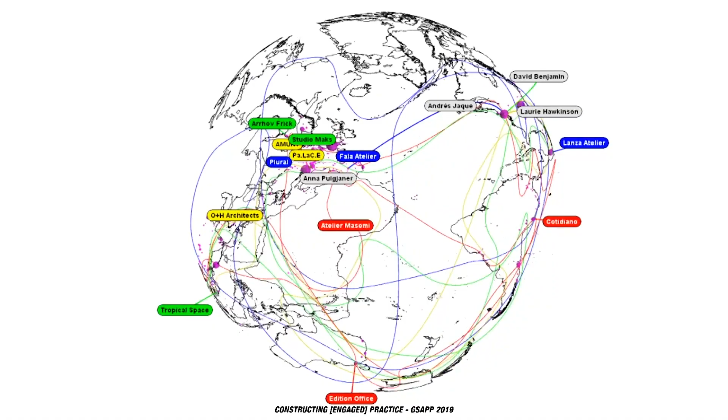That's the reason for renaming the conference as Constructing Engaged Practice. And perhaps we'll change the adjective in future editions as the architectural practice receives new inquiries from the outside.

We have selected four ingredients, we could say four engagements, shaping the present that need new consideration as materials of the project. And we have also selected twelve firms that are already doing it: sustainability, technology, politics, and theory will be the four panels of the symposium today.

They have been very present in architectural discourses in the last decades, an object of interest, speculation, fascination, prevention, even rejection. We could say that they came to the discipline, perhaps in the generation before you, as external topics—a collection of references initially peripheral to architectural practice, brought to the project as ingredients to be taken or not.

But today we can't consider these topics like that, because we know it's impossible to consider them as problems of others. They are part of the forefront of our contemporary panorama, replete with overflowing dimensions and important contradictions. And we, as architects but also as citizens, inhabit the center of that panorama, not the privileged periphery.

The twelve practices today, like in the first edition, have been established in the last ten years and will present the tactics they use to negotiate these conflicts and the contradictory climate that shapes our profession, and how they respond as designers to expand the field and definition of architecture.

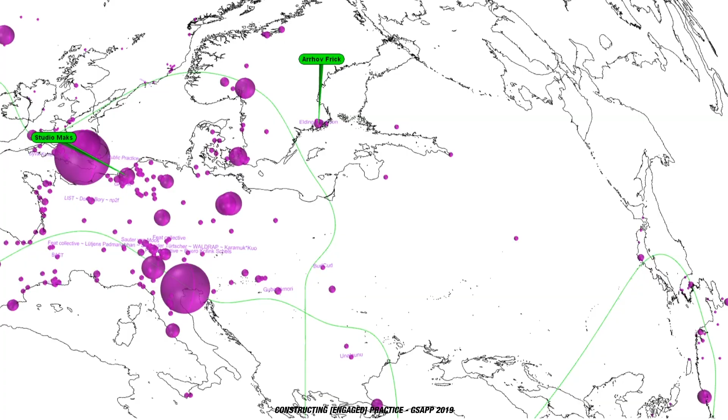Studio Maks: Marieke Kums founded Studio Maks in Rotterdam in 2010. The work of Studio Maks offers a distinctive all-scale blurring of boundaries between natural and artificial domains, between pragmatism and freedom. Her academic research group, Future Urban Regions, explores the reformulation of the existing city with a special focus on topics of this symposium, such as eco-environment and social and economic equations.

Tropical Space: Nguyen Hai Long and Tran Thi Ngu Ngon founded Tropical Space in Ho Chi Minh City in 2011. Like most of our participants today, they work at all scales. Their practice is a significant example of global thinking and local performance, focused on a deep understanding of Vietnamese culture and climate, committed to environmentally friendly building practices and sustainable material selection. Nguyen Hai Long will be helped on stage by Li Thi Nguyen, who will translate his presentation.

The moderator of this first panel will be David Benjamin. Thank you, David, for being here and helping this conference. David is founding principal of The Living and professor at Columbia GSAPP. His work combines research and practice focused on the intersection of biology, computation and design. Benjamin has articulated three frameworks for harnessing living organisms for architecture: bioprocessing, biosensing, and biomanufacturing.

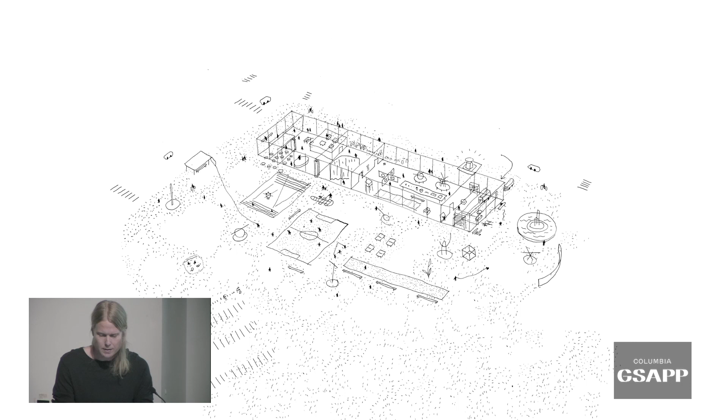In this case, a park in Dessau, where we did a proposal for a new museum for the Bauhaus collection. At that time, for the competition, the collection was spread across three different places around the city, basically in storages. The aim was to collect all those pieces into one space. There were amazing pieces, so we thought the museum was already there—just gathering the pieces into the park. We added what the collection needed: a new shed, more or less, protected from the weather, giving the space natural light and a certain amount of security.

Responsibility of economy is key for us—economy in terms of material, doing the most of a budget, and economy of energy as well. We don't like to design something that everyone has to fight to get built or solve. We want to do something kind of the opposite, that is simple to put together.

This is from my first study trip in architecture school. We visited France, and it was an amazing trip. We looked at all those masters and amazing pieces of architecture, but we also looked at the Latapie house by Lacaton Vassal, which was very special and a strong experience for me. By that time it wasn't so much about extra space, but I remember it was a lot about components and structure—perfectly balanced according to its loads. A beam was not larger than it needed to be; nothing except the necessary was present.

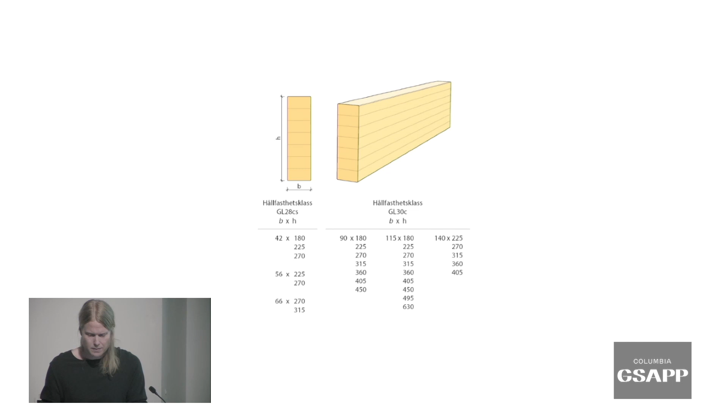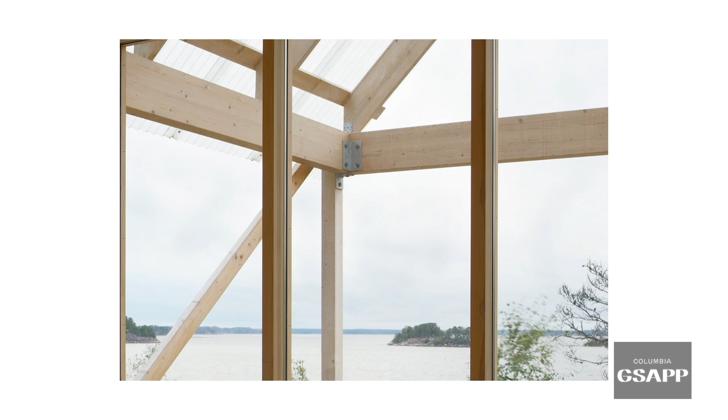We developed a structural scheme consisting of those parts, all components dimensioned as minimal as possible for the purpose—just enough to make the structure stable. The components connected to each other with bolts going through the main beams, and the windows were divided into parts to be carried by one person.

And this is how our internal process looks like. It's always about questions and comparisons - why choose one beam or slab or pillar or system over another? To figure that out, that is our main thing at the office, I would say.

At the moment, we're proposing not only one solution, but several options of how to add free-spanning platforms for a cultural building in a small town in Sweden. We're presenting this project component by component, both for the client and for the city, showing them the possibilities, economic pros and cons, installations, and everything.

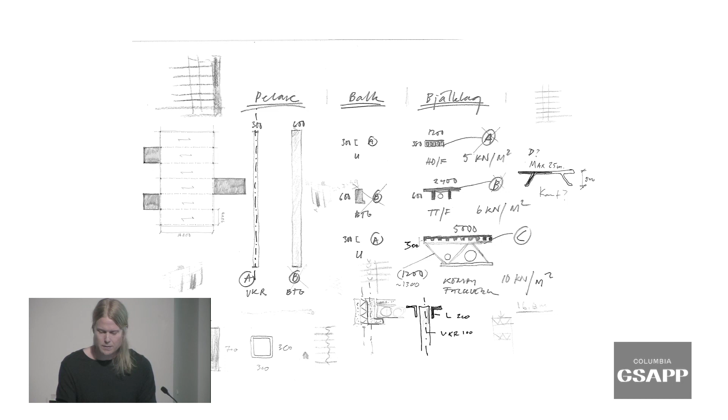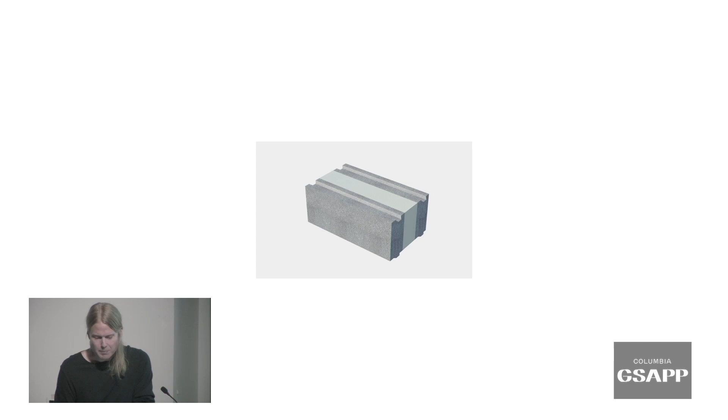In a house we called Six Walls House, the client had a builder already before we started. He was not the best builder, but not very expensive, and he didn't know very well how to build in wood, which is the thing you do in Sweden - Sweden is made of wood, more or less. But he knew and had experience building with light concrete blocks, so it became the only option.

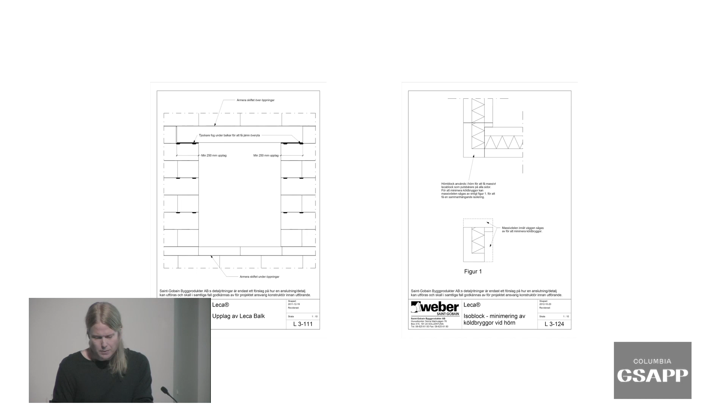And we started by looking into catalogs on the material and its qualities. Basically there's 3 types of blocks, and also one solution for openings, adding a beam. So we used this and started to develop ideas about the most simple geometry you could do, that could not be made wrong, regardless of the builder.

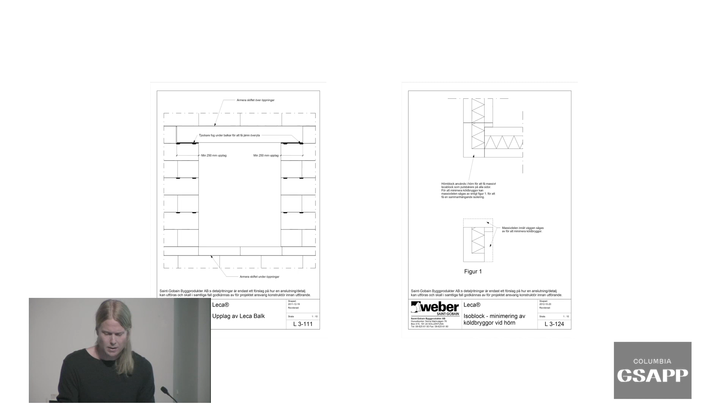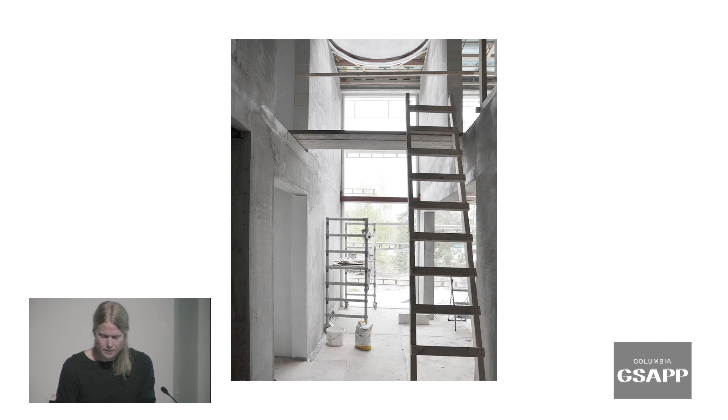So it became these 6 straight walls defining the rooms, as well as becoming the structure of the house. The inside spaces were almost randomly developed. The arrangement of the house was a lot about how to achieve a minimal amount of cutting of the blocks, to use every piece of block that you had, as well as creating as spacious a house as possible - a house developed from the block.

So we want to learn this profession slowly. We don't rush into things. We like to understand what we are doing and what we are proposing. We want to understand every component that we are proposing. We don't want to be doing things too quick. To handle economy as a sustainable approach, we like to see this a little bit like craftsmanship.

You need to know the basics of planning. We did not learn this in school, which is fair enough, but it's really important. It's not rocket science, but if you don't understand this, it's a bit tricky to propose something else - the basic knowledge of where material comes from, the parts that you can get from a tree, for instance, and use every piece of a tree in the best possible way.

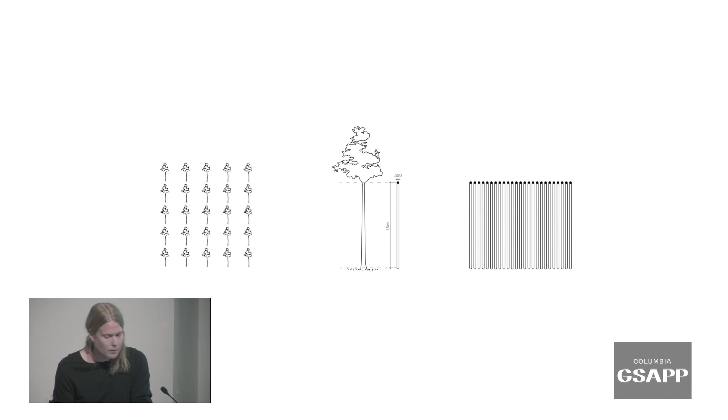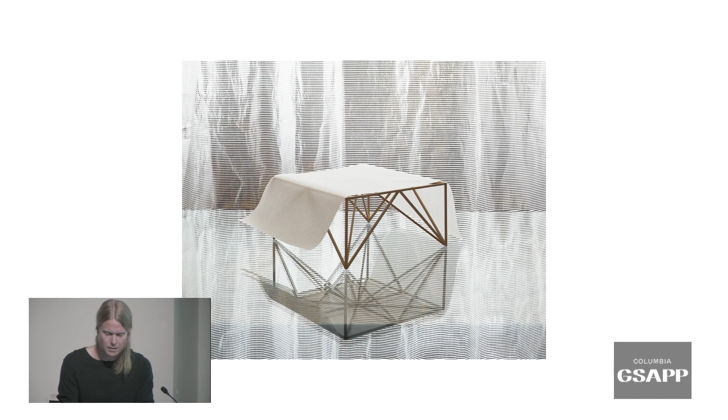25 Trees was the title of a small research project we did at the Venice Biennale in 2016, where we investigated methods for achieving the maximum amount of built space using a minimal amount of material. The result became a truss-like structure depending on the stable triangle, and because of this geometry, each element transferred the tensile and compressive loads with no additional need for stabilization. The scenario became a hall of around 2,000 cubic meters, out of 25 trees.

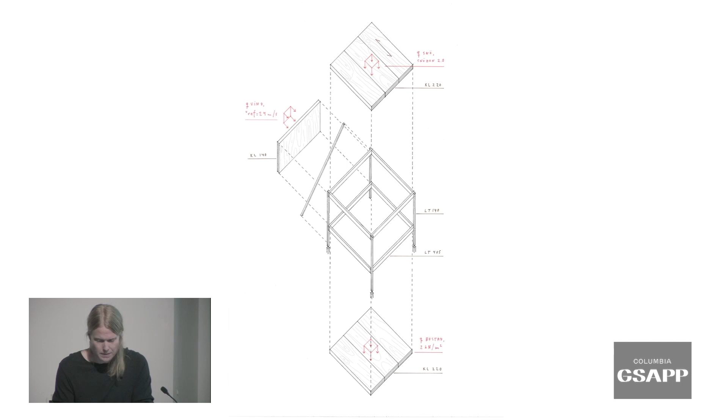At the moment, we're working with ideas for a low-budget weekend house - there will be around 10 of them in a forest area a couple of hours north of Stockholm. Here again, we know everything about this catalog of posts and beams in wood, so we choose that, making as large spans as possible. The floor, roof, closed facade - massive timber, like these old timber cabins, so you don't need another layer of insulation. It's insulated in itself. If you don't have a wall, you need a diagonal beam.

The cultural building I mentioned before will be built in this - it's actually a really small town in Sweden, around 10,000 inhabitants. Our client who has this block asked us to develop this, and the moment we started, we realized this project was all about creating a good foundation for a realistic economy.

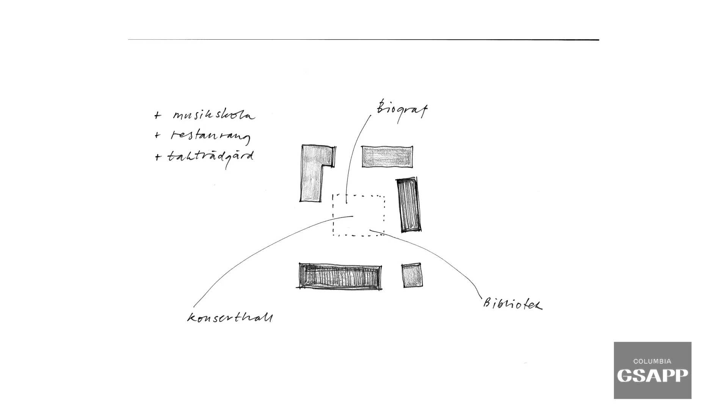So first we proposed to actually add extra program in order to help each other work. There's a lack of a music school in the larger area around the town, so we proposed to add that in relation to a concert hall. And the city, as well as the concert hall, needs a restaurant and so on - so it's about this kind of co-working, sustainable economy.

We aim to respect and learn from every specific site, to be as careful with that as the building component and the economy, to be very careful when changing a site. As much as possible, we want to make building not interfering with nature, like you could one day more or less demount a structure and put the nature back where it was. The weekend house projects we're working on are now made from components assembled with bolts, with as few touching points in the ground as possible. We want to make nature one of the components, you could say.

In the Bauhaus project, it's a light and generic structure placed on top of the park, possible to rearrange and even remove.

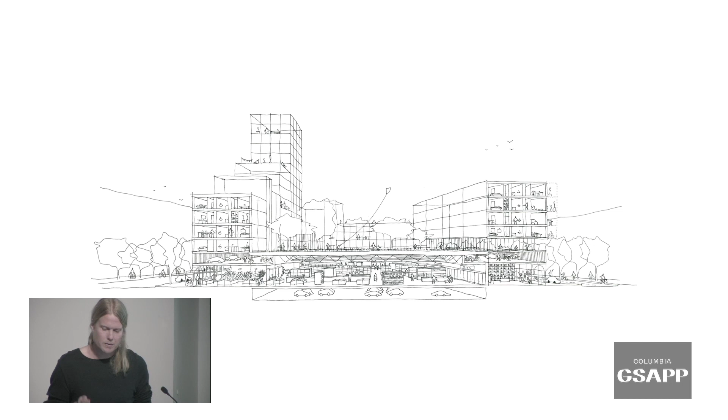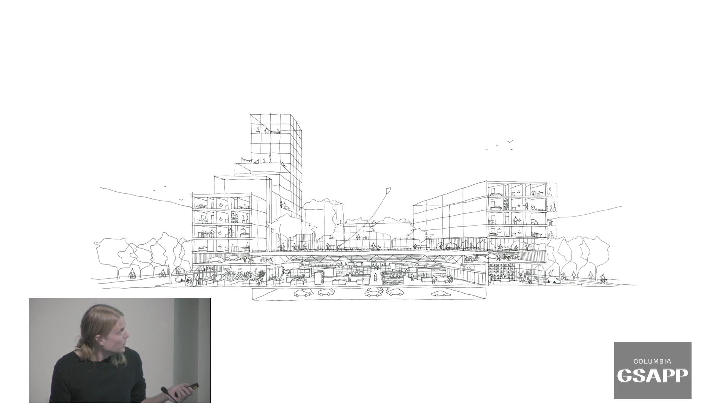In the outer ring, we were really careful about what to add and how to place the structure in order to split this part up. We also could gain this extra floor here, and instead of digging more into the ground for parking, for housing, we put it up here because it didn't need this ceiling height. So it's this kind of small adjustment to, I don't know, gain or save - not save the earth, but yeah, in one way, actually.

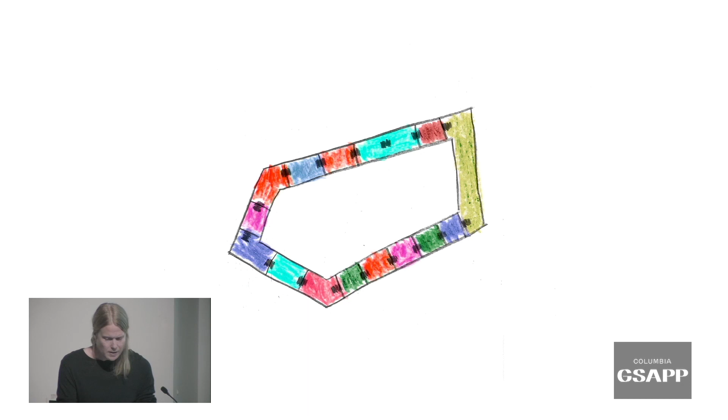So the result of the ground floor programming, with all staircases and structural walls, is shown in this sketch. It kind of forced this large space, the outer ring, to be divided into smaller pieces. For us it's important to take a clear opinion on how to propose this kind of relationship between building and street. Sometimes we don't want a building to interfere.

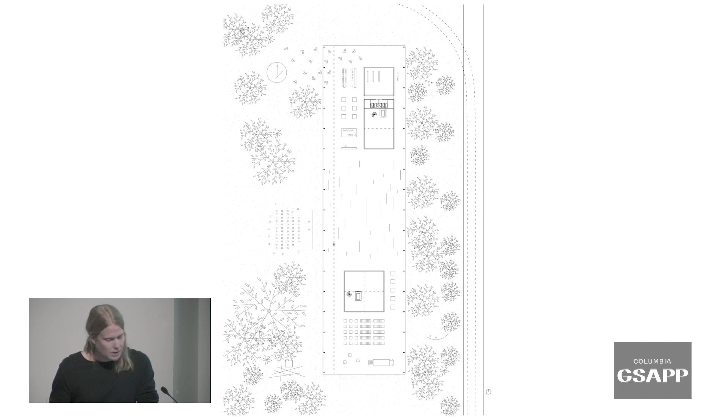The Bauhaus plan, with the context: the main street to the right, where you could load from trucks - you can go into the building with trucks - the main entrance to the north, closed volumes, and the in-between completely open. This was the first sketch we made for this building to interact with the park, which could even have programs as well.

In our space we find ways to let the light enter in special ways, maybe make it a little bit stronger with colors. We placed all the species really carefully to make them happy.

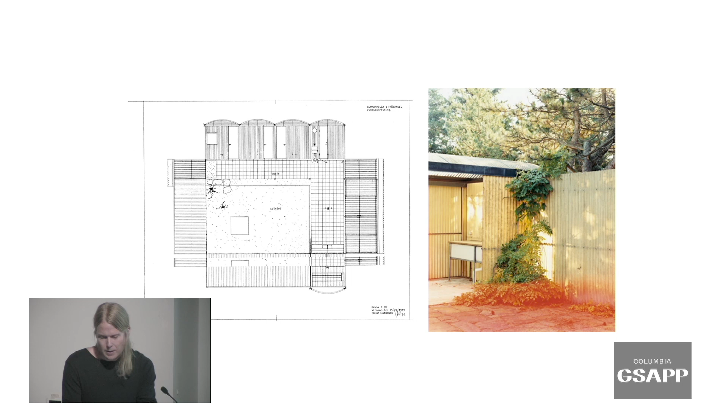This is a really nice project in Sweden from a Swedish architect, Bruno Mathsson. He was operating in the 40s - his own summer house - and he was really obsessed with the idea of living outside. He even made his own device for sleeping outside. He had sun gardens, a sequence through the building, through the inside, and this roof with a plastic covering letting the light inside.

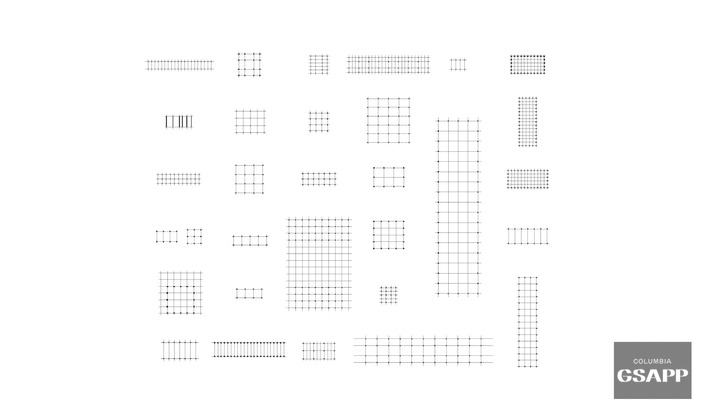So this is not a model of one project, this is different projects. We don't feel a need to invent. We prefer to reuse, even ourselves in our office. So we have this database of our old projects regarding structure, what worked, what didn't work so well. Same with rooms, proportions, windows.

We don't aim for one solution in complete projects. We're interested in open structures with multiple options to rearrange. Now we're changing a project from 50 to 80 units, but the structure is already built.

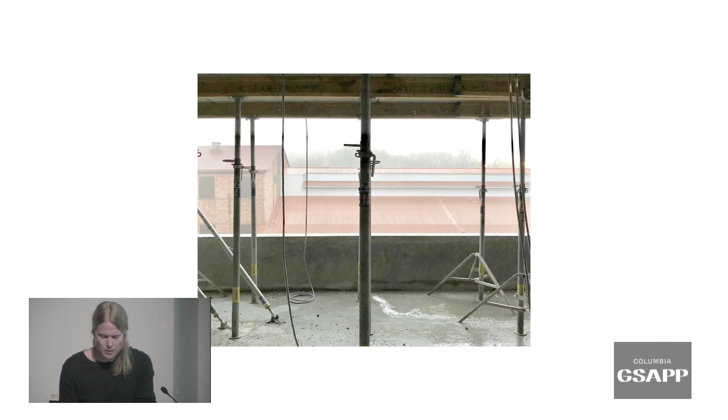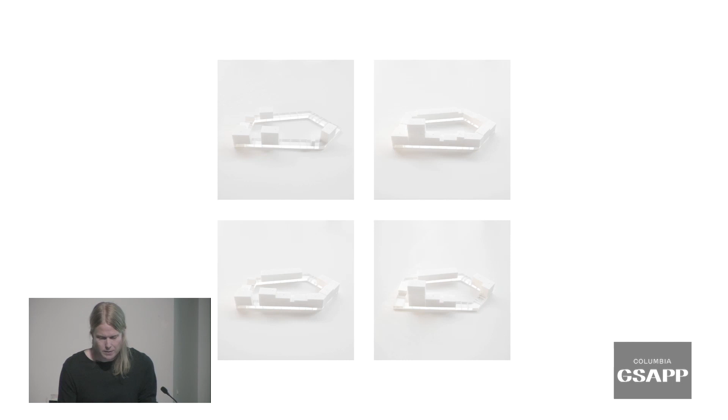This is a common scenario for how we present a competition proposal. This is for the ICA, where it was completely open-ended for future development. At the moment, we're working on a couple of projects without a program, as a proposal from us. Who knows what the future will be for those kinds of large-scale developments.

So we reuse and modify the systems a lot, just making sure that the quality of light is good, the noise is controlled, then we often present the possibilities of the system open for discussion.

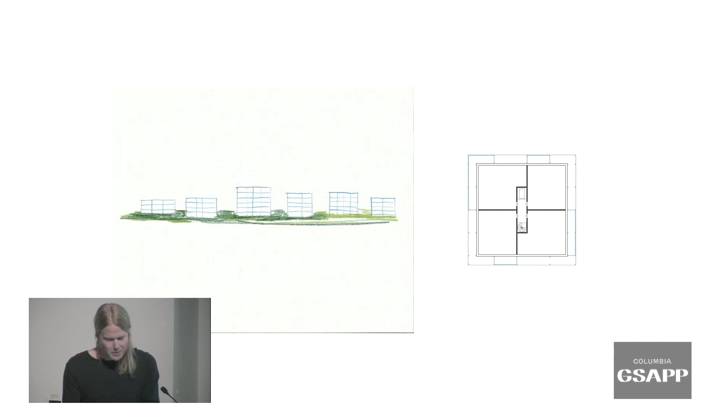So I'm just about to finish now. To let the people and their own way of living create the building or places themselves is central. Not an idea from our side, but from a human perspective.

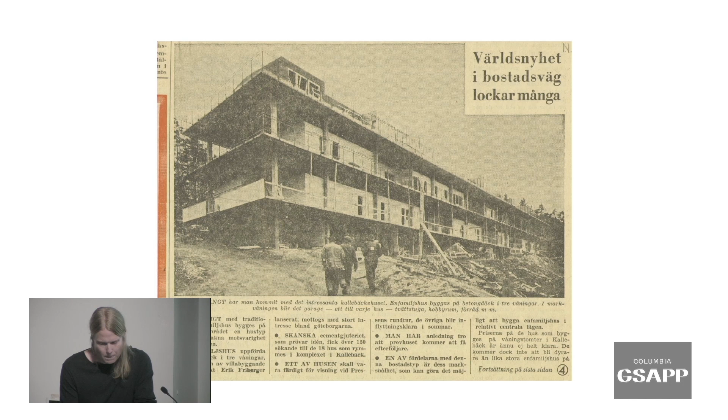There are some really good examples of this. We always find those kinds of direct and realized projects very interesting. This is a project from Sweden where they did 3 platforms in concrete, 80 meters long, and just divided them into plots.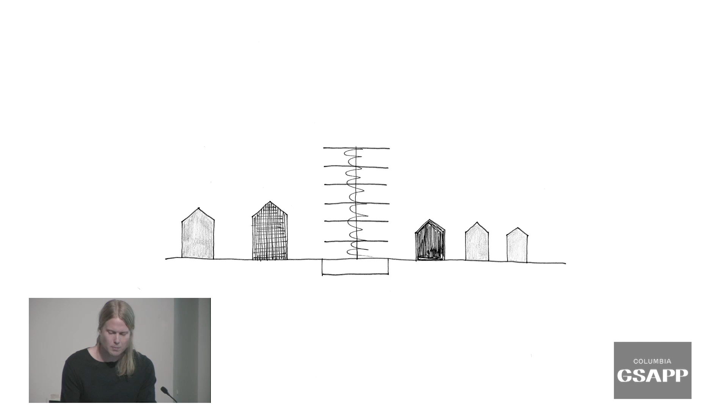So in this small town with the cultural building, we are using exactly the same ideas. The client asked us to insert the cultural program into the existing buildings, but we proposed to keep them and make a new one in the center.

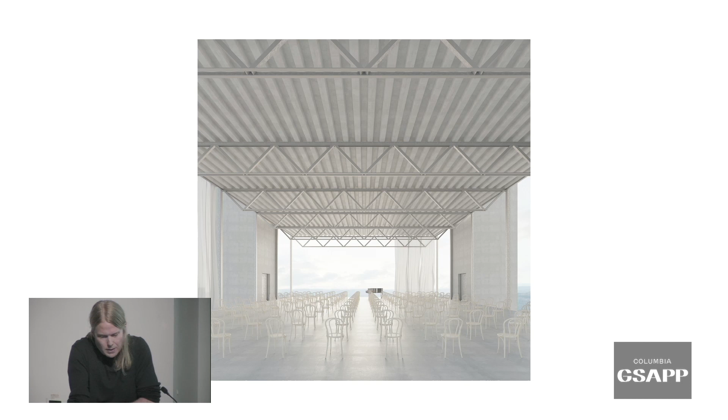So the ambition is completely open platforms, 20 by 30 meters, that will be developed by the city and the people. So perhaps this is our idea about sustainability: the constructive components, open-ended, economic responsibility, natural light, the presence of nature, and the people making it possible. Thank you.

Like Johan said already, it's amazing, this conference. I wish I had it when I was in university.

My name is Marieke, and Studio Maks is my office. There's a lot of people helping to create projects, it's not just me. I've been asked to talk a bit about sustainability, and actually our office is not so known for sustainability, but we are very much involved in creating designs that have great awareness of the environment. So maybe I would like to talk today about natural design, which kind of is in your sub-description, I guess. So I'm cheating a little bit.

I'm going to also explain a little bit how I came to have the office as it is. Like Johan was saying, it was not a very conscious act. Things happened over time.

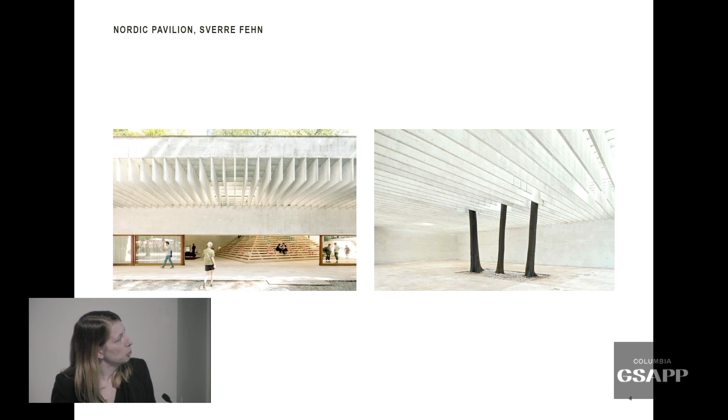So it was really great at TU Delft to get a lot of opportunities to study abroad. I went a bit to Norway, and of course they have really amazing architects there. I fell in love with a lot of the work of Sverre Fehn, and this is still one of my favorite buildings of his, the Nordic Pavilion in Venice actually, not in Norway, but still very beautiful.

Anne taught us a lot about how to experience the landscape, but also to be aware of the environmental influences of the weather, etc. And Eve Blau, I followed a class about transparency in architecture and how to create continuous space, or space that is changing, and she had really wonderful stories about it. So it really kind of freed architecture a little bit for me.

Another amazing thing about Holland is all these kinds of subsidies and scholarships. I got a scholarship to travel around the world, visiting 10 cities in each 10 days to study global architecture, and somehow I also ended up in Tokyo, and I really fell in love with it. I think many people have.

What was really amazing for me was that such an amazingly big city could still feel so extremely relaxed. It's very much a city of objects in which buildings and people and nature, not in all the places, but in some places, found a very equal existence. This became a very important theme in my work.

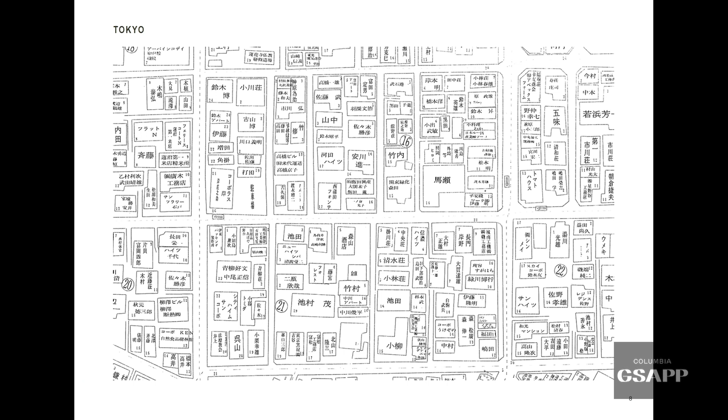The first project I worked on there was also very interesting for me, actually quite shocking. We had to create a space for an event in Benesse Art Site, a group of islands in the middle of Japan. We didn't really make a space as you're used to, with a roof and walls. It was so lightly created and so intuitive how to use it, so non-descriptive that I was amazed the space could be this light. It really opens up a lot of opportunity to create things.

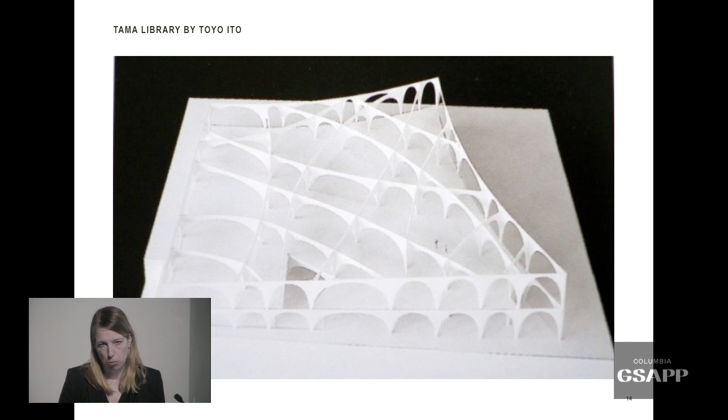There's another person that was very interesting for me to learn from, which is Toyo Ito, and the way he creates designs. I think his way of making things is really a reaction against modernism with its more regular grids. His way of connecting to the environment and to nature is deforming this kind of regular grid and trying to make it open up to the environment, therefore distorting it, which gives all kinds of specificities to places inside buildings.

There's never one space the same. He has this nice thing to say about the way he designs - he calls it generative order. As a tree assumes its form depending on its variety, and by repeating very simple rules, the tree creates a very complex order, but also a very natural order. A tree also decides its own specific form and growth, its shape in response to its surroundings. So it's not a thing on itself, it's something that responds to the surroundings. It's always open to the environment, and when you're under the tree, you don't know if you're in or outside.

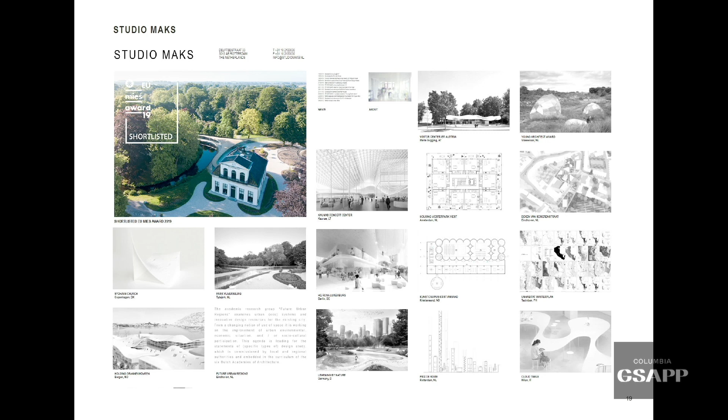At some point I decided to go back to Holland. I did want to start my own office. I didn't know exactly how, but I did think that if I want to create good work, I should do it in a place where I have the most opportunity to do so. And I thought that would be the place I called home, for many practical reasons also.

When I started the office, I received a talent scholarship from the Dutch government, so I could be free of financial worries for the first year, which was amazing, because then you can actually do projects and not worry too much about the financial side of it, and try to explore what you really want to do. Some have the lucky chance to start their own office right out of university, and a lot of us also work for other offices before starting our own thing. For me it was quite a challenge to find my own voice after working for other people for several years, and this scholarship made it possible to do so.

I'm just going to talk about 3 projects to explain a little bit how we work, and they're the 3 more recent projects.

And this is the one that we completed last year. It's a visitor center in Park Vijversburg. And it's also interesting how you actually get projects for your office.

In the beginning, you're very eager and you want to take everything, and at some point you become much more specific. But a lot of the nice projects, like in the Netherlands, there's almost no open competitions. You have to participate, you have to apply with your portfolio, but if you didn't have your own work, you cannot really apply for projects.

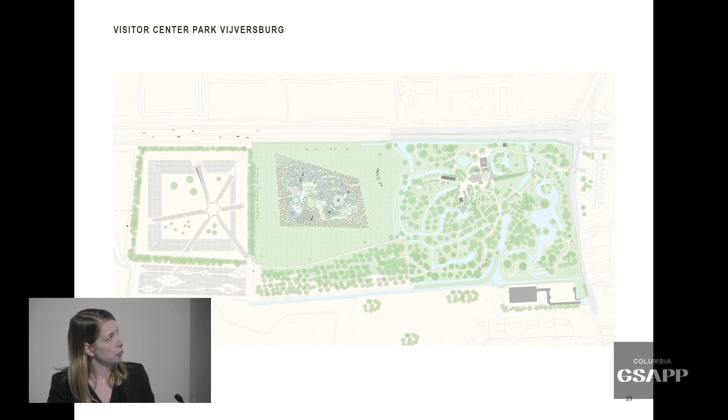This is actually a park from the 1700s, a few hundred years old, and this was the historical mansion. We were also asked to renovate the glass houses, make an open-air stage, and renovate the main house. So there were a lot of little projects all together.

We really wanted to try to make a very subtle intervention. This park is actually a national monument, as is the house, so you're almost not allowed to do anything. It needed to be placed here, but it also needed to be connected to the main house. So they had a lot of requirements.

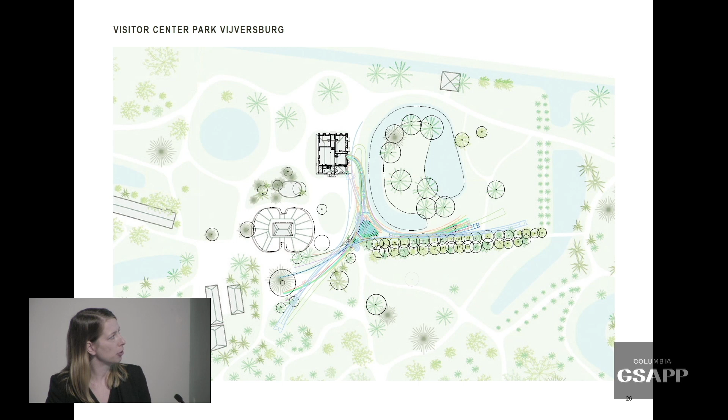So we said, okay, we want to respect the environment, we want to respect the existing landscape. So we pulled 3 lines along the main elements, and then we tried to situate the visitor center in between, and it becomes almost like a little animal. Every time we found there's a tree there, okay, we move the building a bit. So it's kind of dancing until it became a final form.

We also really respect the budget of clients. Sometimes we get comments that we make a bit crazy designs, but we always make them very carefully. This building form is also decided by optimizing the shape of the panels, the number of building products, and standardizing as much as possible so it fits the budget. In the end, we managed to make it fit the budget.

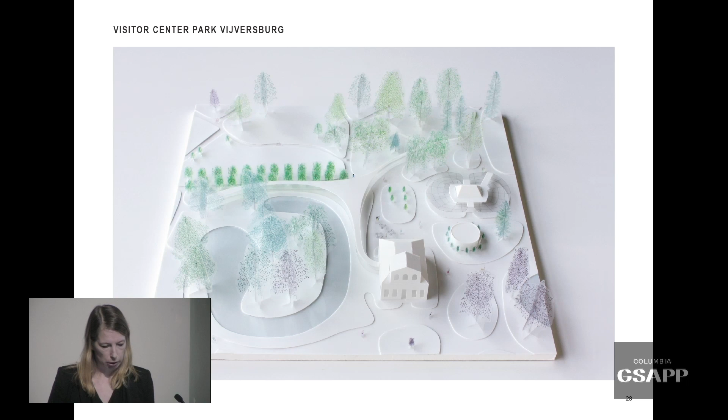This is a model. We work really a lot with physical models, also to communicate with our clients. And this is the building. This is the historical house, and this is the pavilion.

When we were talking to our client and presenting it in the competition which we won, we still had some columns in the building. But when we had to present to the monumental committee and say we can build something like this in a historical park, they said okay, you are only allowed to do it, you can only get the building permit if your building becomes as transparent as possible and doesn't become this really fat, ugly green glass building.

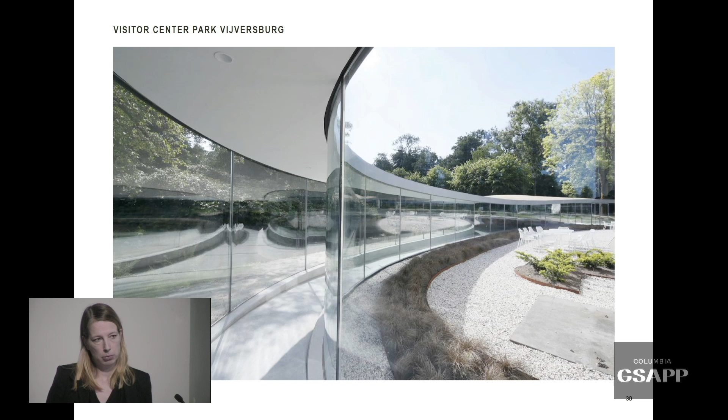So we spent a lot of time optimizing the transparency of the building, even kicking out the columns and making the glass the actual structural component of the building. In the center there's an auditorium where 100 people can sit, but basically if you enter the visitor center, you're redirected to parts of the park.

This building has to do with, like in the Netherlands, it's not really a question if you were making a sustainable building. The sustainability requirements are so high, almost the building has to be energy neutral, so you have to be very inventive if you want to make a fully glazed building.

So here also you see slits along the ceiling. This has a tropical roof, so the air can naturally ventilate through the roof. There are shutters there, and it goes out through the gutters of the roof.

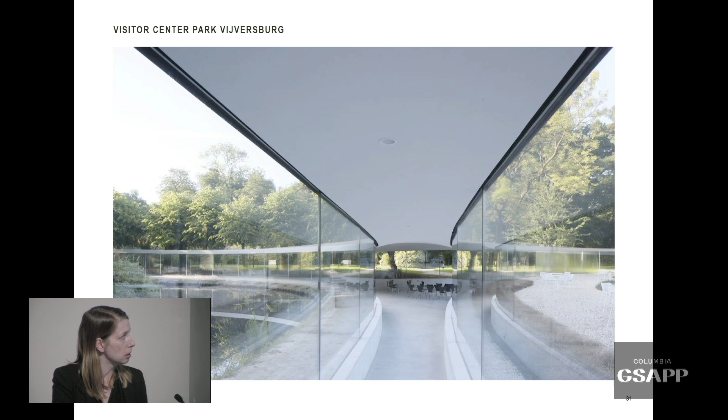The glass is made with a high insulation value. We have little magnets in the ceiling, almost invisible, so you can hang curtains as sunscreens in case necessary. In this way, we managed to complete that building and try to make a building where, when you are in the building, you actually feel you're outside.

A second project I want to explain is not realized yet. We're working on it now. We just received a building permit and they start construction next year. It's a housing project in Amsterdam, and it's actually done with a project developer.

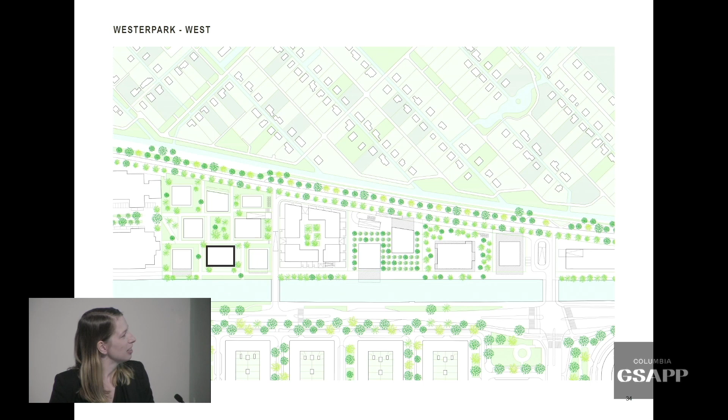It started by MVRDV that organized a competition for young architects to give them a chance to do bigger projects, which is very nice—they're becoming the mamas and papas of the younger generation. We won a housing block here with 40 apartments inside. The developer just wants to make money, so as long as you have a really great plan, they're happy with it. So we were allowed to define our own user group, the number of apartments, etc.

We said it's really difficult for young families to stay in Amsterdam. The housing prices are getting really high, around 10,000 euro per square meter. So if you buy an apartment for 50 square meters, it's 500,000 euros, and a lot of people don't have that money. So we tried to give a very compact family house with 2 stories and a garden, and stacked them.

So the family has a really good condition of living in the city, and it's still affordable, and they feel like they're living outside. In the Netherlands, the ultimate family home is the home with the garden in the green. So we have these super compact apartments, all surrounded by large balconies. Some have 40 square meters of outdoor space, and their own home is only 70 square meters.

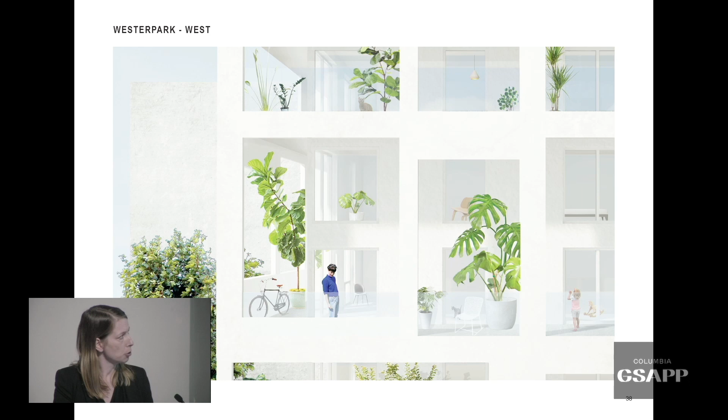These zones around the houses become a buffer between the city and the house, between the very public space and the very private one. They also help for sun shading, act as a sound buffer, and because they can put a lot of big plants there, they create a kind of microclimate for birds and little bugs to exist in the city. There's a lot of research for this in the Netherlands.

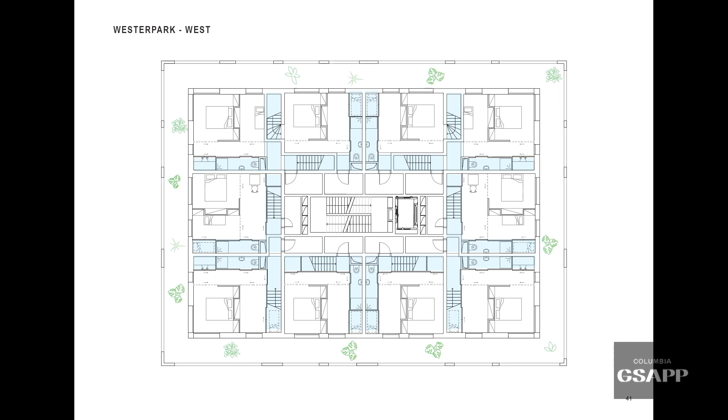Inside the house, we also developed a new housing typology with very compact walls containing toilets, kitchen, and everything, so you can create open spaces and use the square meters very efficiently. This is the ground floor of the house, and these are the upper floors of the family apartments. You can even have a little study, maybe a kid's bedroom. It becomes all very alternative living.

Another competition we won—actually, we win most of the projects we have through doing competitions. This one is an open competition in Austria. That's another interesting thing in Europe: you can easily do projects in other countries as long as you speak the language a bit. It's a visitor center for a new university just outside of Vienna, specialized in biosciences and natural sciences, and they wanted a visitor center to receive guests.

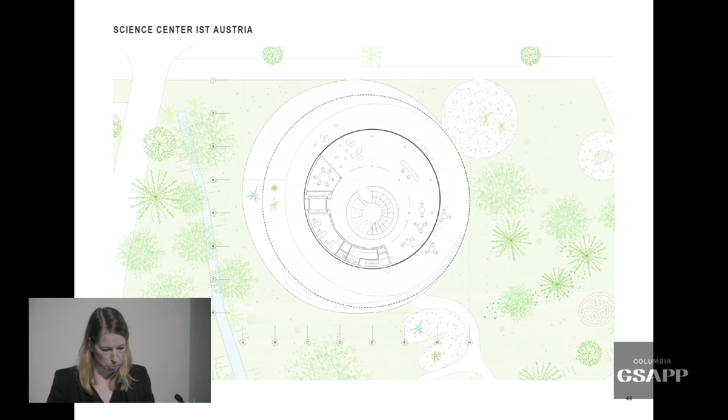But also to explain what science can make possible. We created a little floating cloud in the park. This is a very monumental site, and we wanted visitors arriving here to still feel the beauty and the outdoor space of the park, not go directly into an enclosed space. We designed a round volume integrated into the park that can be approached from all sides, with a big staircase going downstairs, and really big exhibition spaces underground.

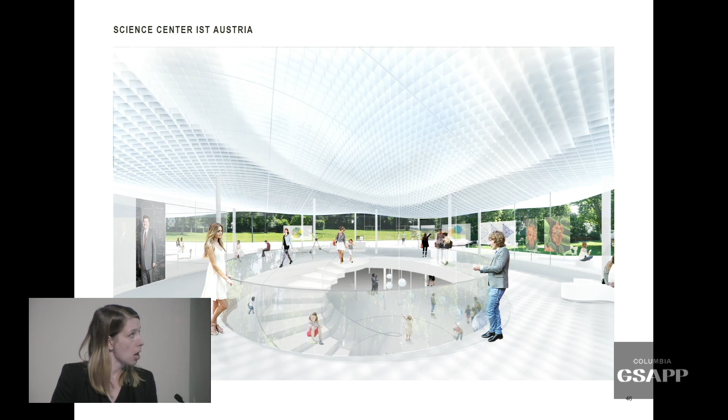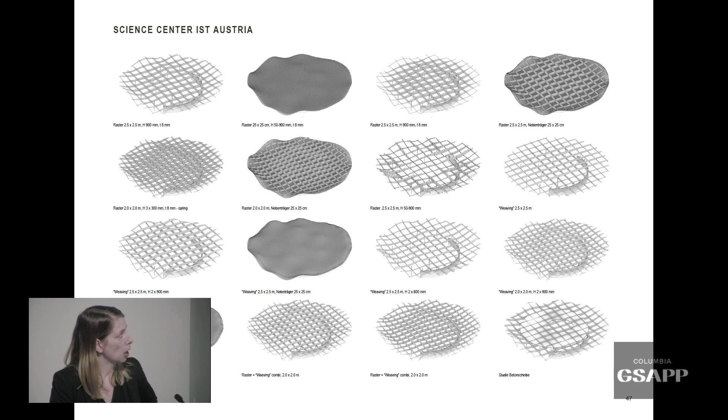We're testing a lot how to create this project by optimizing the structure, because here too there's a very tight budget—optimizing how we can produce the structure, how the light works, what kind of effects it can create, and what optimization of the structure means for the interior experience. We make one-to-one mock-ups in our office of parts of the building to see if it really works as we want it to work.

I'm just closing off a little bit. I think there's many ways to make architecture. For me it's very important that it's rooted into its context and linked to the people that use it, but that it also creates a certain freedom and inspires people. But there's also this relation between technology and society and the forces of nature, and this all plays a foundational role in our design process.

We use our work to explore the cognitive possibilities of architecture and how the built work can impact the way in which we know ourselves and the environment. So architecture becomes a tool to understand the world and also to improve its situation. Thank you.

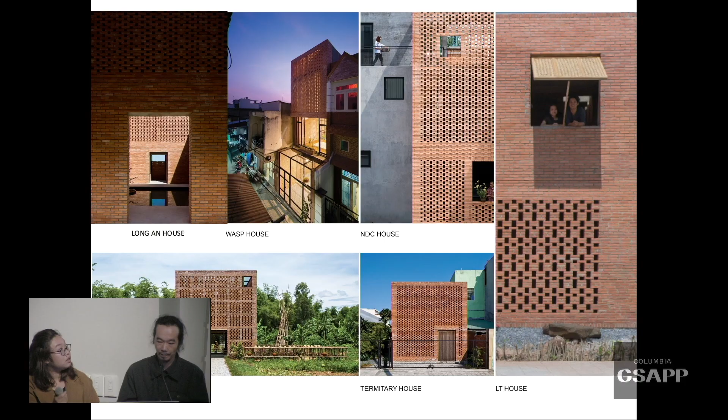And this is the project that we've done in our practice. Different projects have different contexts in different regions of Vietnam, and they're dealing with different issues. So I hope that by introducing some of our projects, we could show you the context in Vietnam and what we're doing at our office.

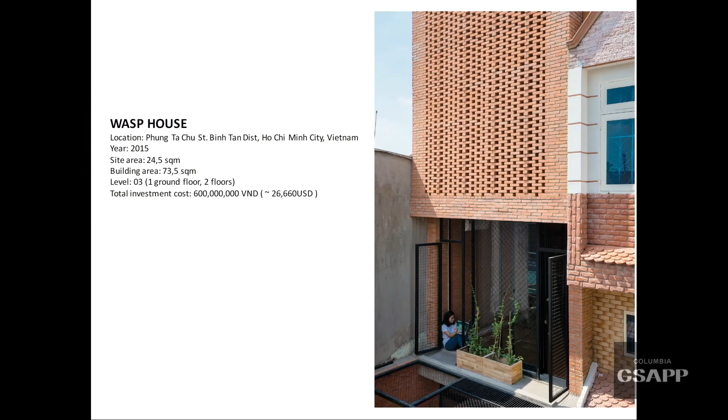So this small house is in a small alley, a small neighborhood of Ho Chi Minh City, and this is a very typical area where most people live.

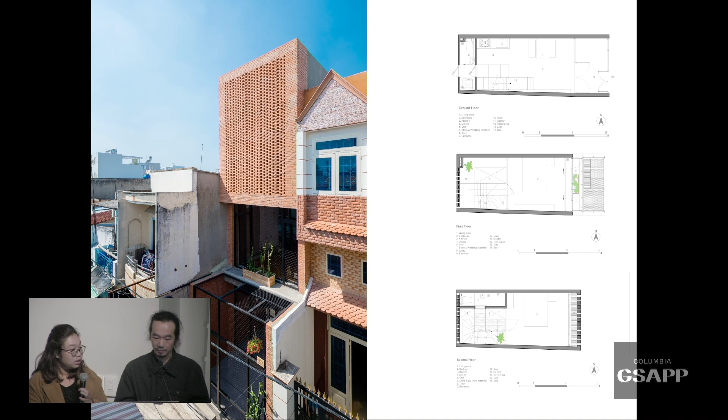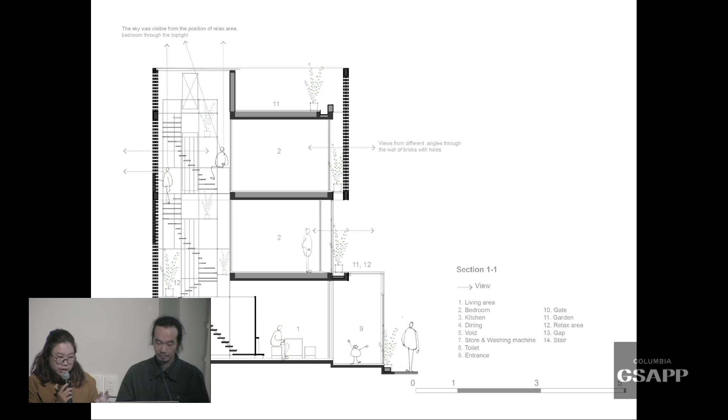So the size of the house is 3.4 meters wide and 7 meters long. So the area is very small to accommodate 2 people. So we try to utilize the stair to create a sharing area so that we can put more function in this space.

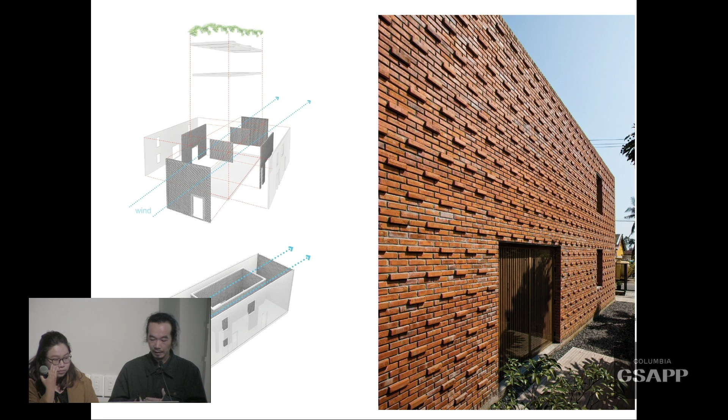So we create a house with north and south walls. We create the porous wall so the wind can go through the house.

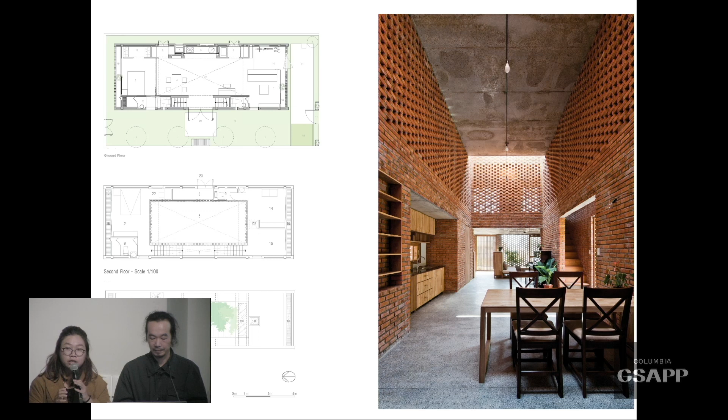Besides that, on the east and west sides of the house, we created buffer zones with sub-functions like storage, stairs, toilet, and kitchen, to make the house sturdy and limit the heat from the west and east directions. So on the east and west side, we allocate sub-function spaces like the toilet, stairs, storage, and kitchen, creating a buffer layer to decrease the heat going directly into the center of the house, while also keeping the house more steady in storms.

During cold seasons, we use a buffer layer of doors in front of the north and south sides that can be flexibly opened and closed. In the front and back, where we have the porous wall, we also have a glass slide door, so they can flexibly use it in the rainy season.

We wanted to create a centripetal space at the center of the house, like a cave, where light participates in dividing the space and evoking emotions about materials. So in the center of the house, we have a large common space with the kitchen, dining table, and other spaces. We want to use sunlight as the main material here, so it can define and separate different functional spaces in the house. We can have more emotion on the surface of the materials, and have the feeling of being in a cave where sunbeams come in.

These are the spaces that draw wind through the building. This space we create acts as buffer layers that bring the breeze in, creating flow to all corners of the house.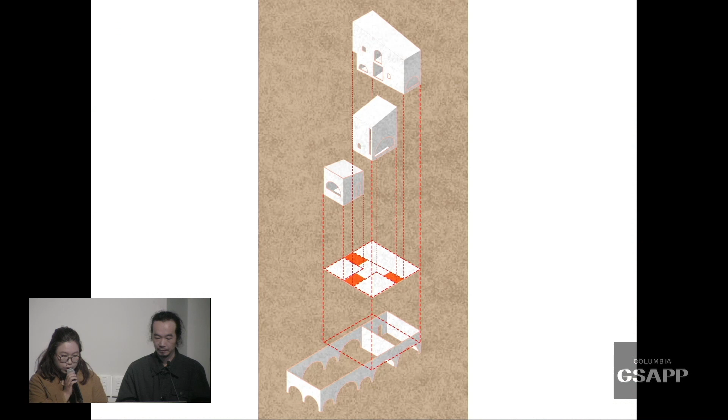With this house, we want to create a house with two functions. On the ground floor is a cafe, and on the upper floor is the house for the family.

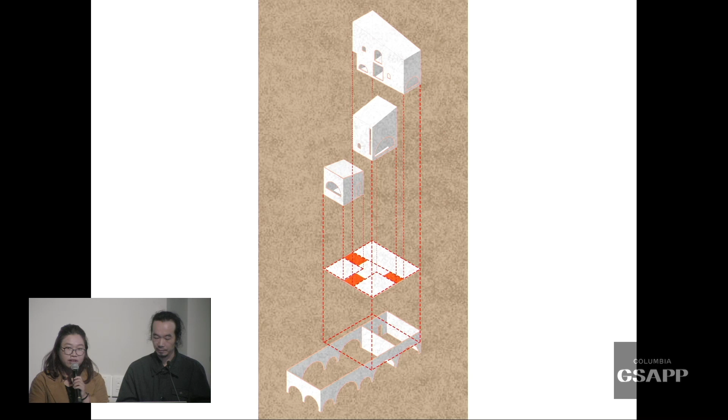The upper floor has three blocks for living functions arranged side by side. We wanted to evoke the feeling of three rock blocks placed next to each other, creating gaps between them. So with this project, on the upper floor, we have 3 blocks of functional space. You can think of these 3 blocks like 3 big rocks placed next to each other, creating a gap between them.

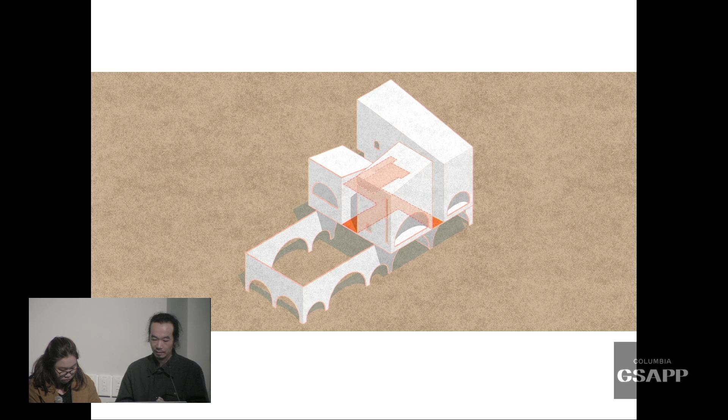We want people to interact between inside and outside, to have different viewpoints as well as experience light differently at various times of day. With the house, we also create different views for the people living there, and between those gaps, it creates different vision for people looking from inside and outside the house. It also helps people feel the change in time through the movement of sunlight.

And these are some pictures of the project.

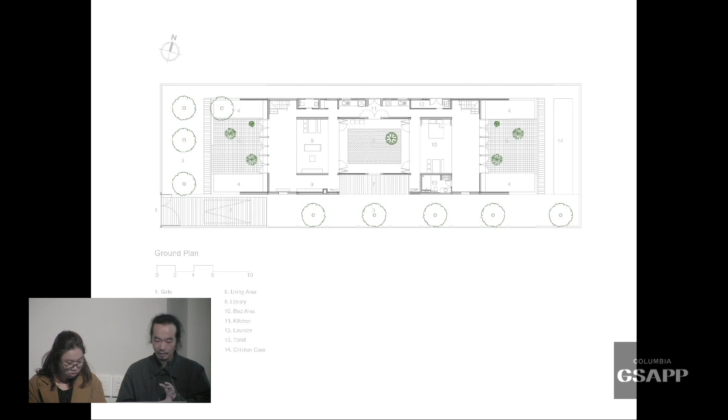And those functional areas were separated by the gap of the house and also the sunbeam.

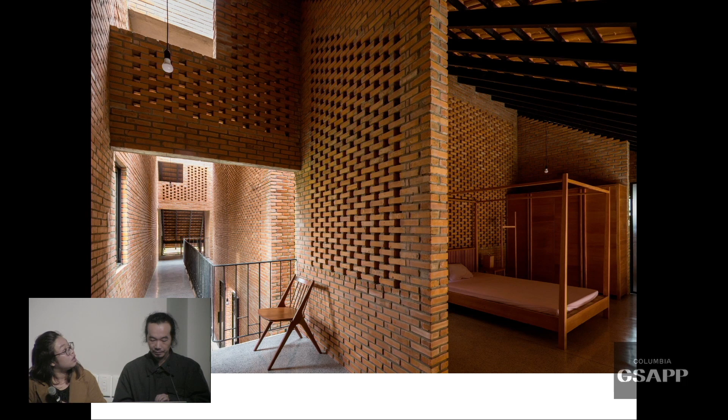So with different purposes of the space, the function itself, we use different intensity of sunlight to define the place itself.

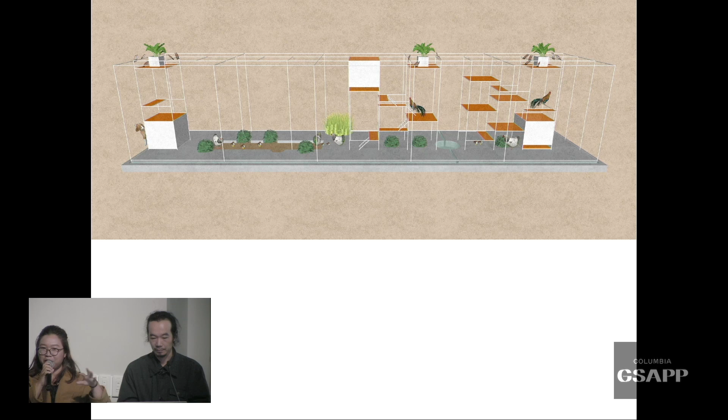So after constructing the Long An house, we still had some metal left from the construction, so we used this to build a chicken house. This house is actually for a small community of animals, chicken and duck, so the kids, when they go back to visit the grandparents, get to know about the activity of the animals, which they could never see in the city.

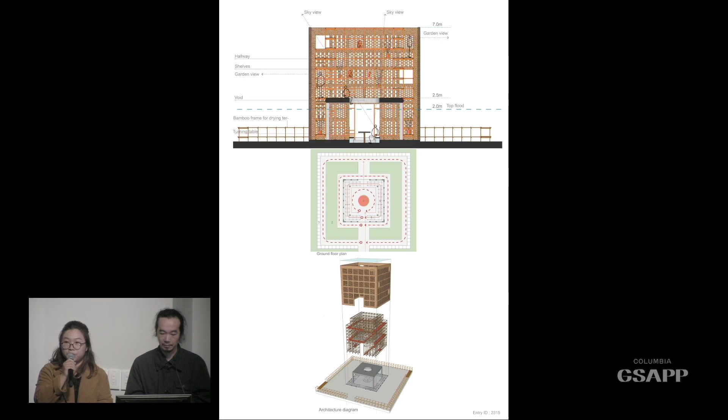The artisan works in the center of the project, where the pottery wheel is, at the boundary between light and shadow. He may move around the table, but this is where he can find the conversation between himself and his work at the same time.

The mezzanine of the project is where we place the pottery shelves. Every year during the rainy season this area floods, so the shelf protects his products. Unlike the south of Vietnam where we deal with heat, here in the central region we have a stormy season every year, with floods rising 1 to 2 meters.

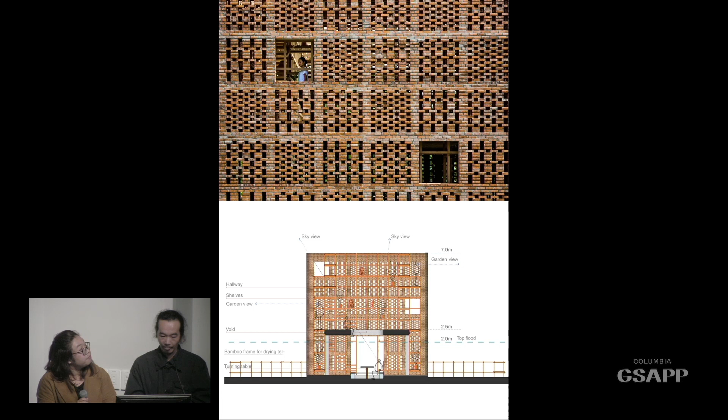We wanted to create a building with a porous, hollow shell so the artisan working inside could still sense the outside environment - the light, the sound, the wind, and the humidity. So the shell of the project is very porous, allowing the artist to still feel and see nature while working inside, and hear the sound from the river, the trees, and the garden.